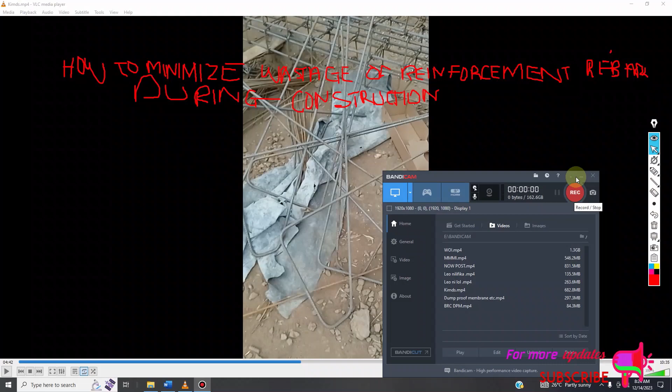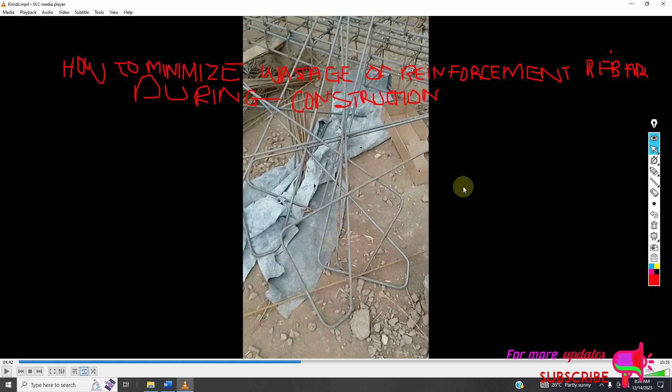Today I'm showing how to minimize wastage of steel reinforcement rebars during construction. So it is important if you are a site engineer to know how you can minimize wastage, because steel rebar reinforcement is very expensive and you can be taken into account for any kind of wastage that occurs and the cost which has not been foreseen.

So you will find that there is a lot of wastage and you are not going to achieve the target based on what was planned previously. So you end up having a lot of waste and you end up making your contractor make losses during the project. Okay, so you have to determine first the wastage so that you can minimize it. So the first step is to determine the wastage.

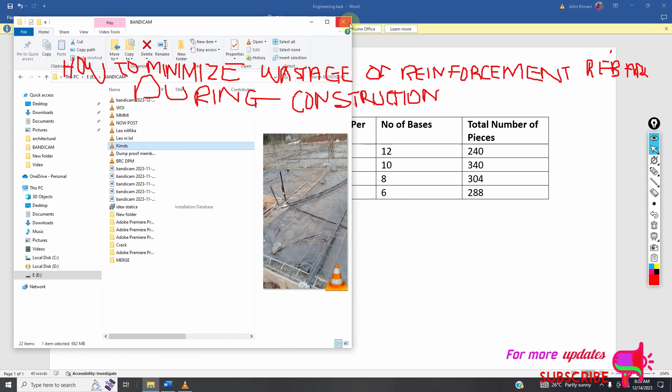So as you can see here, I have this data where I'm going to do fabrication and fixing of reinforcement bars, and I need to determine the wastage out of this. And to do that, you need to know the cutting length. So let's say I have a number of bases where I need to do my fabrication and fixing of bars. I need to know the cutting length for each base, the number of pieces required for each base or each grouping, and the total number of bases.

And to do that, I can determine the total number of pieces required. So let's say base 1 is 1500 by 1500 millimeters in dimension, that is width and length, and the depth is about, let's say, 350. So the cut length, if you take into account the clear cover of 50 millimeters on both sides and also top and bottom, you find that the cut length is 1.9 or 1900 millimeters.

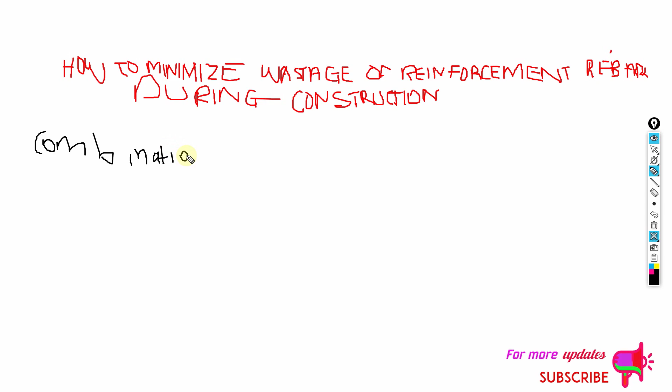So for combination 1, maybe we start with base 3 and base 4. For base 3, the cutting length is 2.8 meters. For base 4, the cutting length is 3.1 meters. The total number of pieces to complete base 3 will be 304 pieces. And the total number of pieces to complete base 4 is 288 pieces.

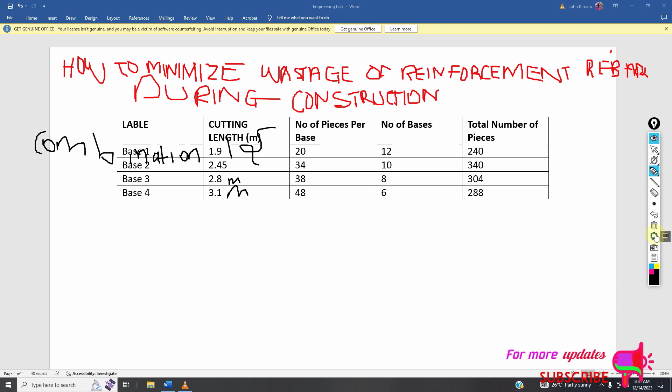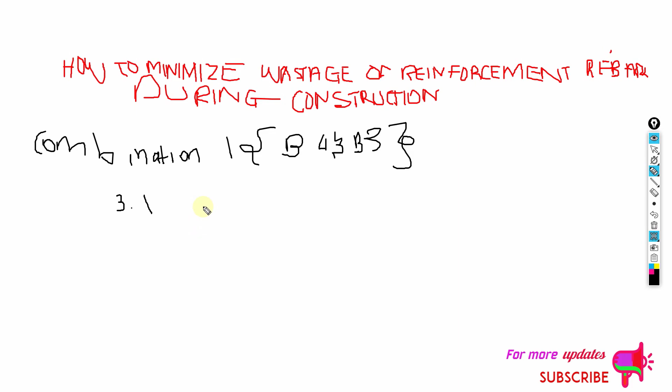So we will start with base 4 and base 3. We know that the cutting length of base 4 is 3.1 meters, plus the cutting length of base 3 is 2.8 meters. So we need to determine how many 3.1 meter and 2.8 meter pieces will form one full bar, which is 12 meters.

So you can put x here, and here is y, and it should equal one full 12 meters. So x and y are basically the number of 3.1 meter pieces and the number of 2.8 meter pieces that will form a full 12 meter bar. And to do that, we need to know the total number of pieces required for each.

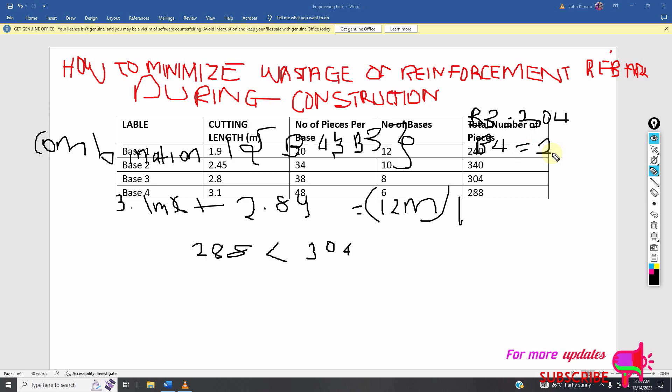So for base 3, the total number of pieces required is 304, and for base 4 it is 288. But you see that 288 is less than 304. So for base 3, we need how many pieces? 304. For base 4, we need how many pieces? 288.

Okay. So because 288 is less than 304, in this formula we will use more 3.1 meters, that is for base 4, because we require fewer pieces for this. So in this equation, we will use more 3.1 than 2.8 per one full bar.

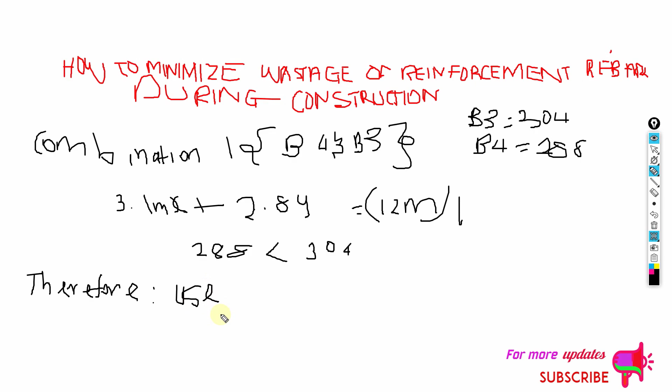So therefore, we will use more 3.1 than 2.8 per one full 12 meter bar. So per one 12 meter bar, we will use more 3.1 pieces than 2.8. I hope you have understood that. So let me wrap this.

So we find that we will need more 3.1 meter pieces compared to 2.8 meter pieces in one full 12 meter bar. So for me, I prefer to use only one for this. So how many do we need for the 3.1 meters? We will need about 3. So if you do the math, use your calculators. This will be about

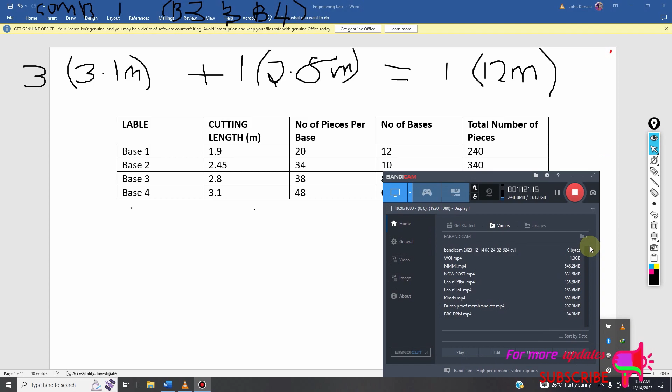So if you do the math, you find that the summation of these two will give 12.1 meters, which is approximately equal to 12 meters. So this one is okay. So we know that for the 3.1 meters, we needed how many pieces? We needed 288 pieces.

So we need 3 pieces of 3.1 meters per every one full bar. So we need 3 pieces per each 12 meter bar. What about for all of them, that is 288 pieces? So you will cross multiply. So it will be 288 divided by 3 multiplied by 1, which is equal to 96.

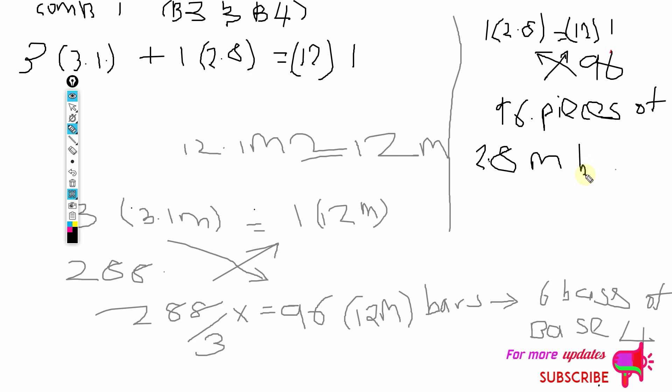So how many 2.8 meter pieces will we remain with? If one 2.8 piece comes from a full 12 meter bar, just one piece, what about 96? Then we cross multiply. So it means that we will remain with 96 pieces of 2.8 meter bar. Okay.

Therefore, because we have 96 2.8 meter pieces, how many pieces did we need? How many can we complete for 2.8? So for this one, let us say that during that day you only remain with 2 bases, that is 2 base 3, because the rest have been done and only 2 of them are remaining.

And actually, sorry for that, you don't need to be remaining with two bases of base 3. It's simply because you have these 96 pieces of 2.8 meter remaining for base 3, and these pieces can only complete 2 bases, because 2 bases will require 38 times 2, that is 76 pieces. Okay, and you remain with the extra.

So this one can only finish 2 bases, 2 base 3 footings. So the rest, the 20 pieces which are remaining after subtraction, are what we call wastage.

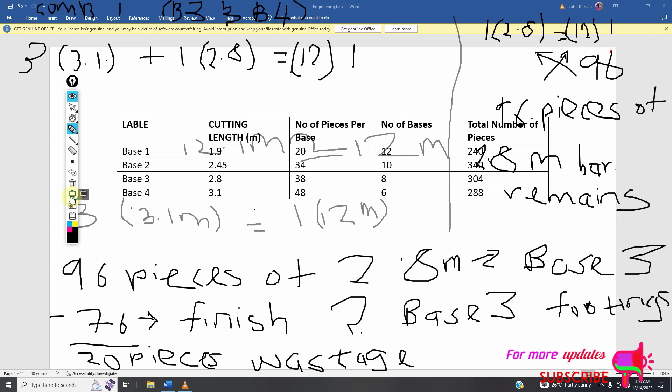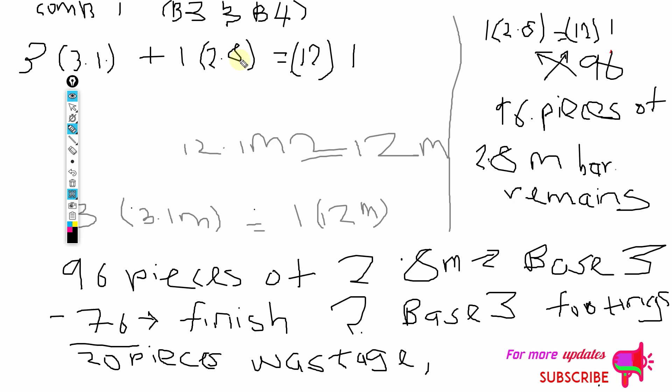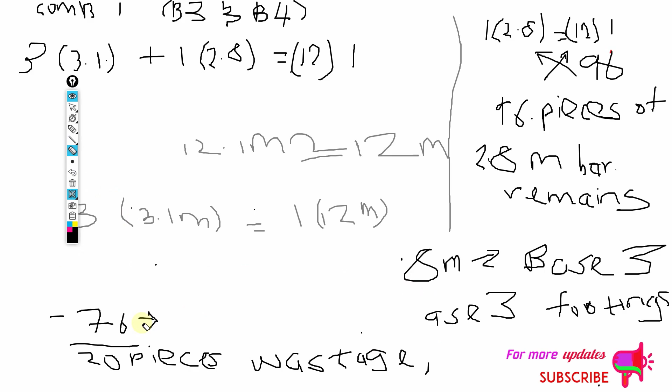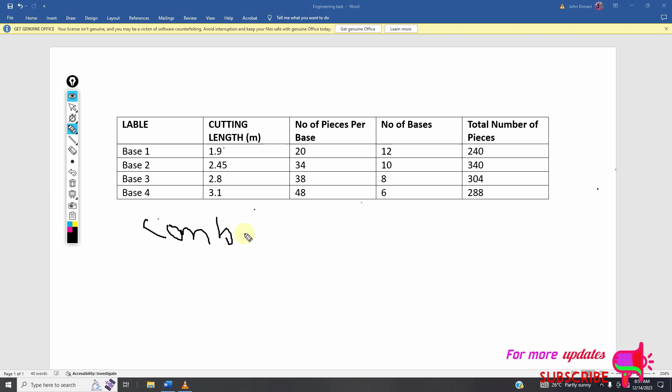So guys, I will leave you homework to do the 2 combinations that are remaining. So I want us to do the next combination, that is combination 2, base 1 and base 2. That is, we need how many 1.9 meter pieces plus how many 2.5 meter pieces

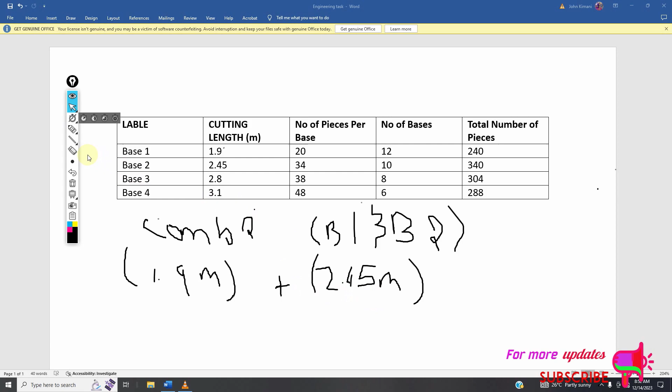actually 2.45. This one was done after I minimized wastage on my site, so it was initially 2.5. So 2.5 will give us how many? Just one 12 meter bar. Okay. So this will be my homework for you.

You can follow the previous steps that I've done to complete this and to determine the wastage. And my answer is the wastage for this will be equal to 14 pieces. So see if you can find that answer.